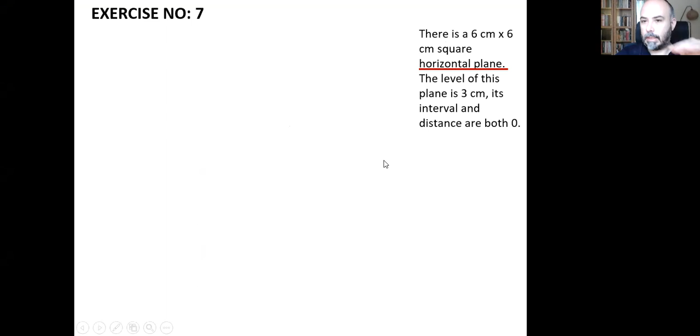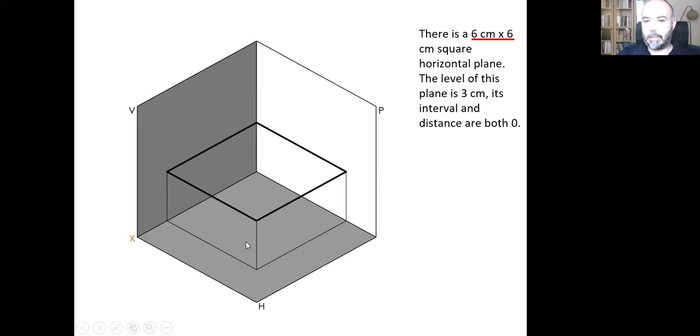So let's remember how the horizontal plane looked like. It is here, it is parallel to horizontal projection plane and perpendicular to vertical and profile projection planes. And it says that it is a 6 centimeter by 6 centimeter square. So this is how it is created. Since its level is 3 centimeters here, and its interval and distance are both zero, we can locate it, we can position it like this.

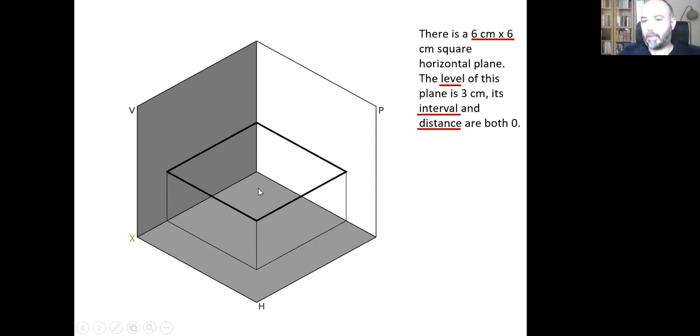There is a 3 centimeter level difference between horizontal projection plane and our horizontal plane. However, these edges are intersecting with vertical and profile projection planes. And these are the dimensions in millimeters. On this plane, there are three profile projecting lines.

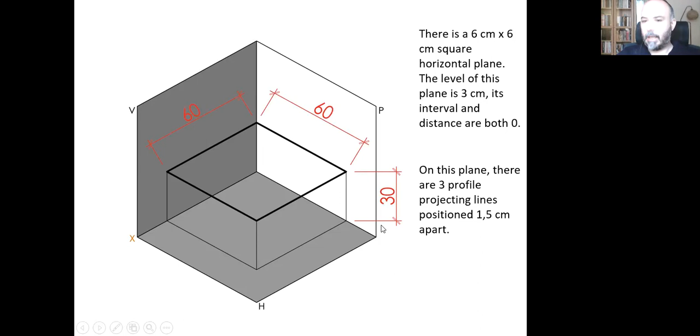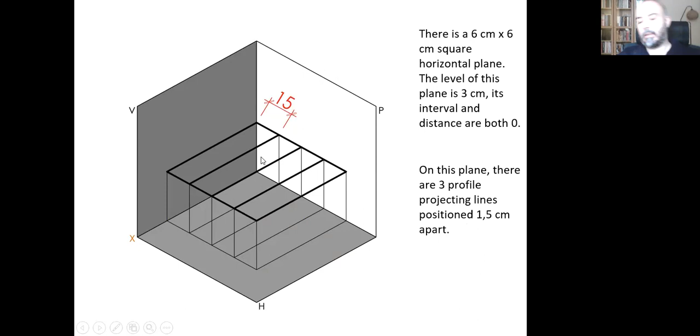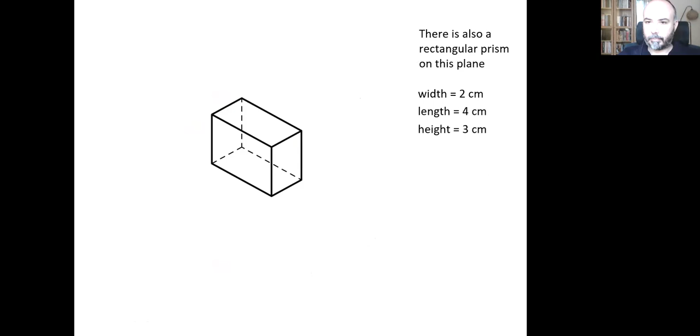And there is also a rectangular prism on this plane. This is what a rectangular prism looks like. It has certain dimensions. Its width is 20 millimeters. Its height is 3 centimeters, and its length is 4 centimeters.

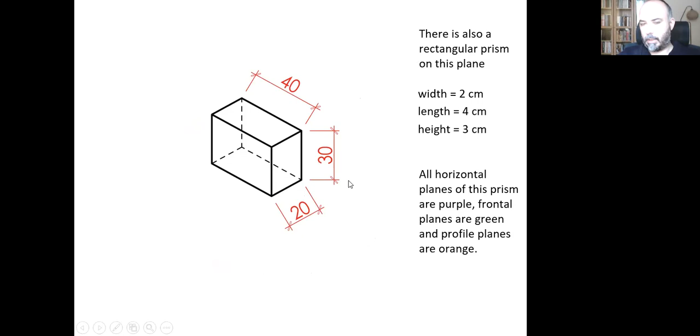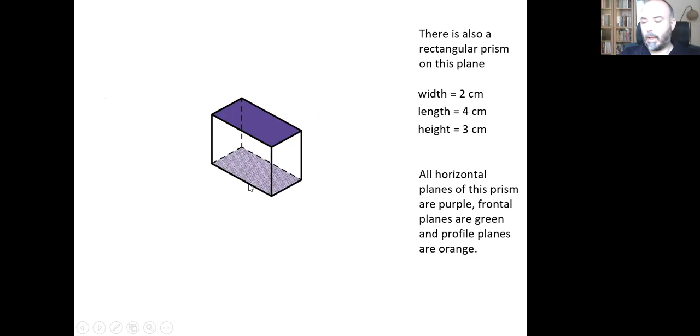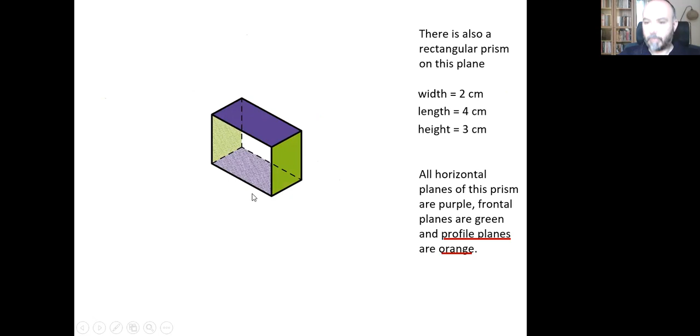All horizontal planes of this prism are purple. The horizontal plane was this. So all these surfaces, the two surfaces are purple. Frontal planes are green. This is the frontal plane. So these surfaces are green, and profile planes are, here we see the profile planes. They are orange here. And it is positioned on this horizontal square plane that we already created.

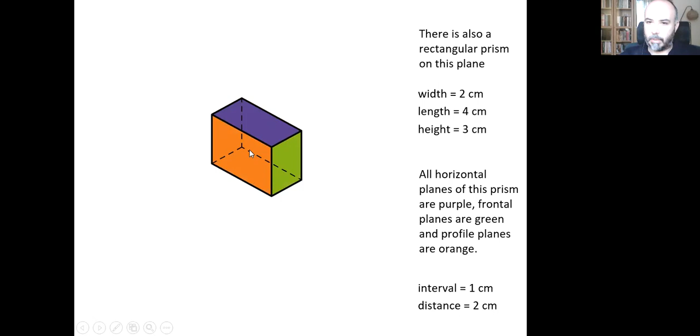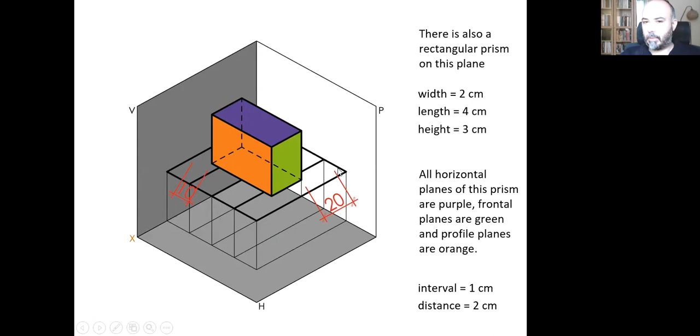It's been centered so that interval and distance for this prism is 1 centimeter and 2 centimeters respectively. Here we see a 1 centimeter gap between vertical projection plane and the green surface back here, and 2 centimeter gap between the profile projection plane and orange surface back here.

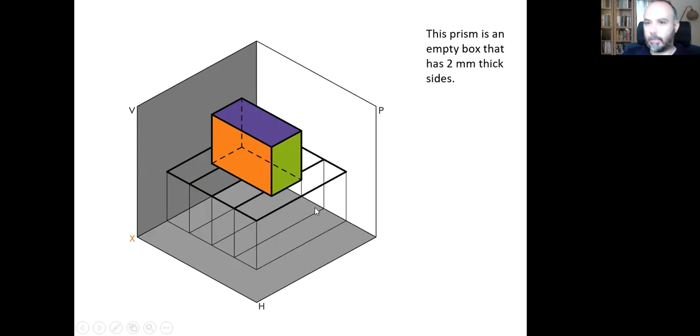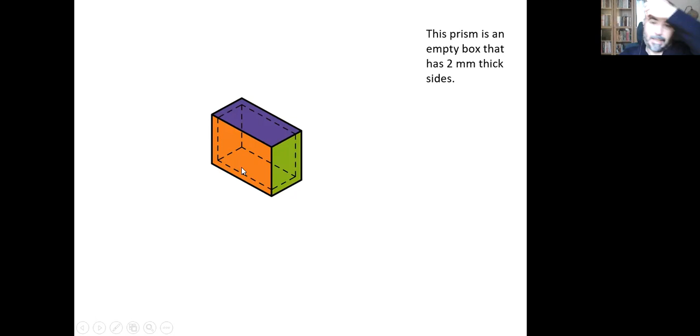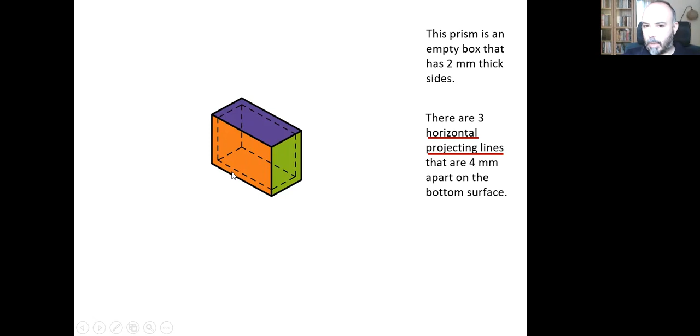And it continues. It says that this prism is an empty box that has 2 millimeter thick sides. Here we see the thickness of all sides, all 6 sides, and there is an empty space inside this box. There are 3 horizontal projecting lines that are 4 millimeter apart on the bottom surface. So on the bottom surface of this box, there are 3 horizontal projecting lines.

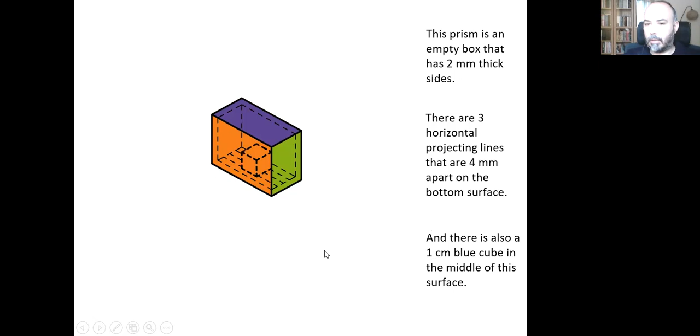Here we see they are perpendicular to vertical projection plane and parallel to horizontal and profile projection planes. And there are 3 lines, each have 4 millimeter gaps between them. And there is also a 1 centimeter blue cube in the middle of this surface. So this is the whole system.

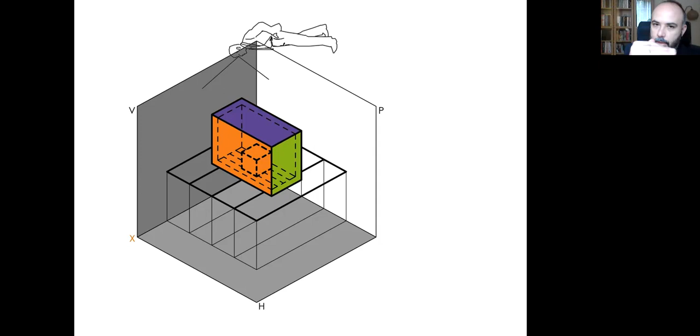As the exercise, we are asked to hand draft the projections of this system on Epure of Monge by using our usual drawing tools. We are supposed to color them after the drawing is finished. So we can start by imagining that we are at the top of the system and we are looking down and we are supposed to draw what we see at this position.

So we can start by fixing an A4 drawing paper on our table. We learned how to do that 2 weeks ago. And after that, we can draw a pair of Monge squares. These are our projection planes. We can choose 8 centimeter squares for each plane.

Here, at this situation, we are above the system looking down. So we are seeing a horizontal projection plane in front of us. We cannot recognize the vertical and profile projection planes. So to start with, we are just concentrating on this part of our Epure of Monge, try to ignore the rest, and we know that this line here represents the vertical projection plane.

Since we are above the system, we cannot recognize that it is a plane. We can just see the upper edge of the plane, and here this line is that upper edge. And this is the same with the profile projection plane. We cannot recognize that it is a plane. We can just see the upper edge. Here, this line represents the upper edge.

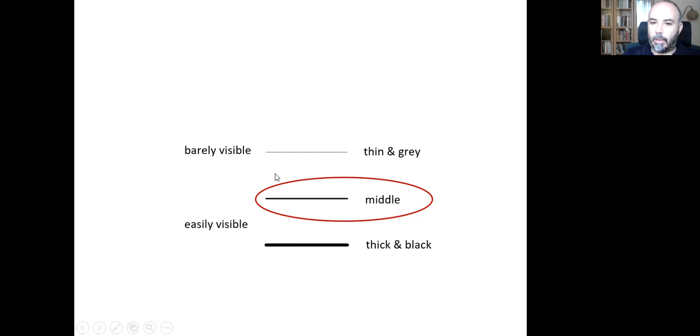So while drawing the frames of these projection planes, we need to choose one of these lines, and we need to go for the middle one. Because as you can remember, the thin and gray ones are the barely visible lines that we use as guiding lines. If we want to make sure where our lettering, our drawing, or anything else needs to be positioned, we can use these lines as the guiding lines. And the rest is for our visible lines. And we need to use the middle thickness, middle darkness lines in order to create the frames of our projection planes.

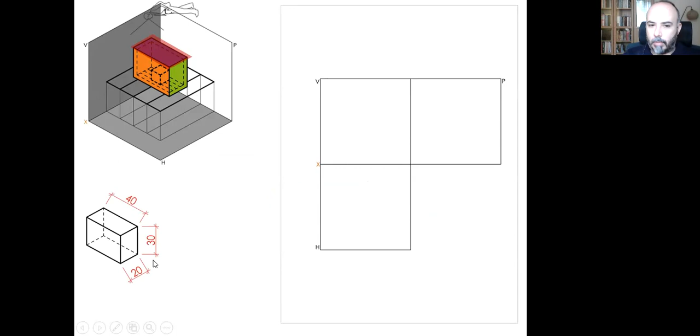So let's start with the surface that is closest to us. If you are standing here on this position, this purple surface is the closest one to us, and we need to draw it. Let's remember its dimensions. We see a 40 millimeter length and 20 millimeter width. And because of its position, there is a 1 centimeter gap between the vertical projection plane, and from the profile projection plane there is a 2 centimeter gap.

So if this line represents the vertical projection plane and this one represents the profile projection plane, first I need to use my T-square and set square and measure a 1 centimeter length in this direction, and do the same to measure this time a 2 centimeter gap in this direction so that I can find this corner here. And it is this corner of this purple surface.

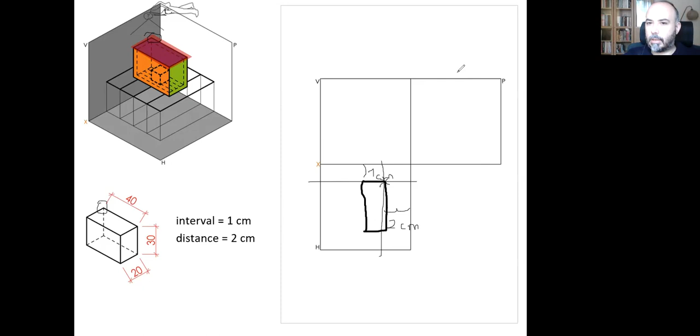Once I find this corner, I can start drawing the rectangle, the purple surface here. I need to go 4 centimeters down and 2 centimeters to the left so that I can create this drawing here. And imagine that we did this drawing. Again, I am using the middle thickness, middle darkness lines because this is something that I want to show to other people. It's not a guiding thing for me.

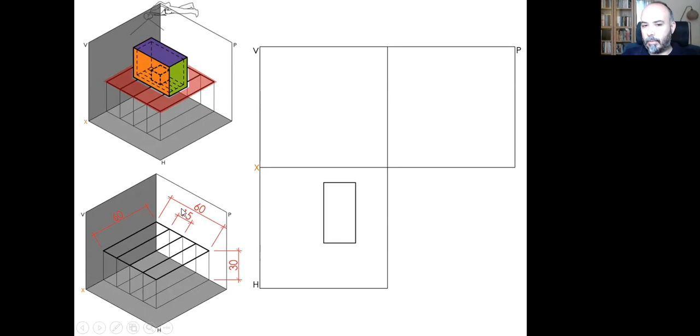Once I finished drawing this purple surface, that was the closest one to me, I can move a little bit further and I realize that there is this square horizontal plane with profile projecting lines on it. I need to remember the dimensions. It's a 6 centimeter by 6 centimeter square plane with 15 millimeter gapped lines, 3 lines. So this is what I need to draw right now.

And since the interval and distance of this plane are both zero, I can start drawing over this line for 6 centimeters, and then I need to go downwards to create a perpendicular angle for 6 centimeters, 6 centimeters in this direction, and I can close the system. And after that, I can measure just 15 millimeters here and draw this line that goes under the prism, and create 2 more similar lines. And here is something that you need to consider.

While I'm drawing, I left a little gap here. I did not intersect these lines with the edges of that purple surface, because this is a trick that you can use. But please do not forget that this is optional. It's not mandatory. If you want, you can use it, or you may not prefer this method. This is just to indicate that this purple surface is above the lines and the square surface here. There is a level difference. This gap is to indicate that feeling in a better way.

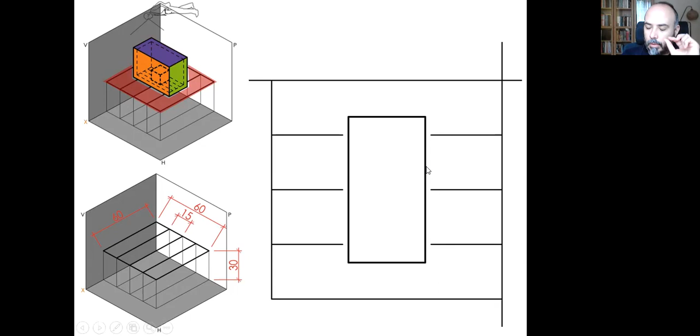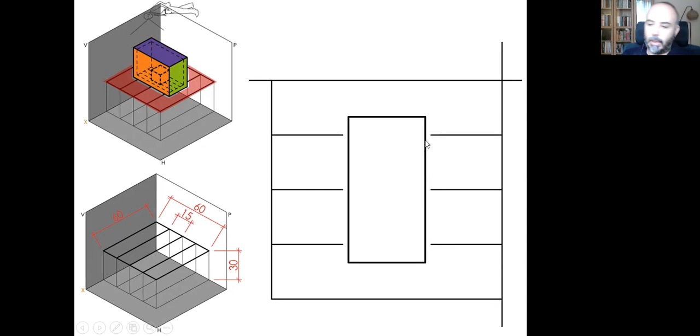And you need to leave a very little gap for this. You shouldn't prefer a wider gap, otherwise it may cause other problems. The gap should be just a little thicker than the tip of your pencil. That will be enough to express this feeling here. And now I drew the purple surface and the one a little bit lower than this surface, this square plane here. And I am just checking, is there anything left here? No. And now I can start drawing the inside of the box.

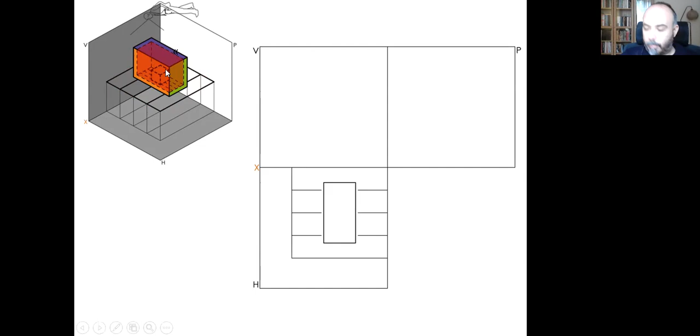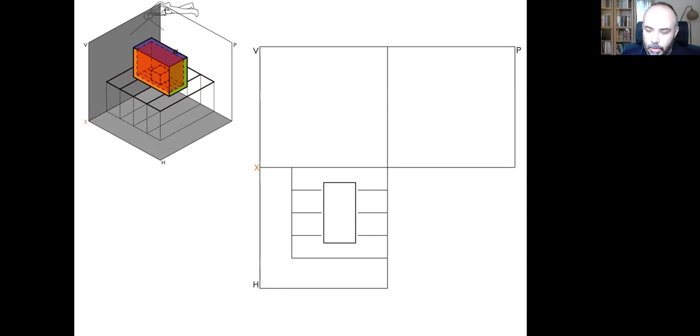Normally, I don't see that because it's a closed box, and this purple surface blocks my view. So I am not able to see what's inside the box here, but I need to give this information so that other people who are going to use this drawing can understand that it is not an empty box and there are other objects inside this box. And how can I do that?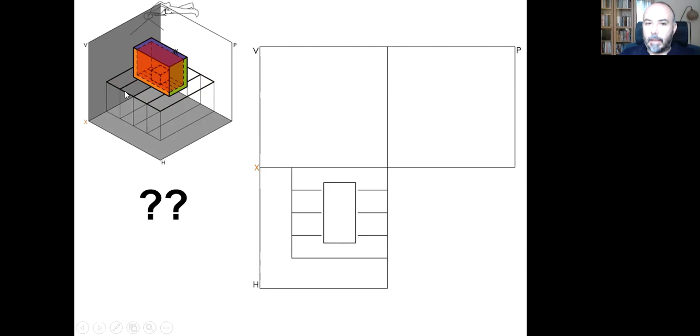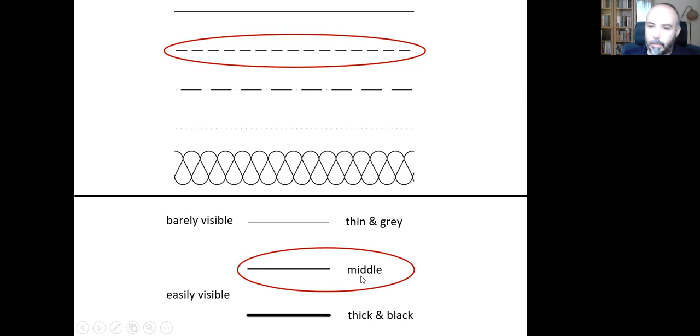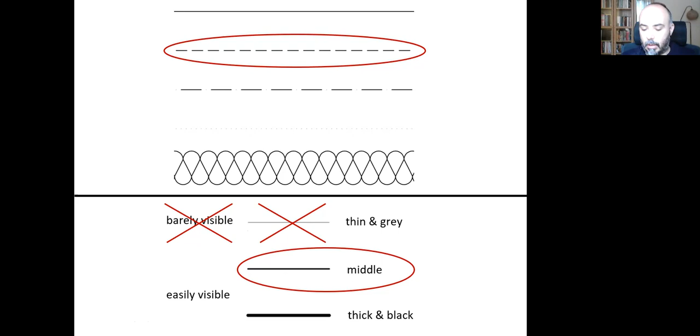For those two things, we can prefer this dashed line here, but please do not forget that this dashed line should be created using middle darkness, middle thickness line weights. When we say that this line represents something that we cannot see, many students get confused and try to use thin and gray lines, because they think these lines should be barely visible. Please do not get confused about it.

You need to use this dashed line here with this line weight, middle thickness, middle darkness. You don't go for barely visible lines. That is something totally different. That is a guiding thing for ourselves.

This is the reason that it needs to be barely visible, because I do it myself for myself. I don't need to express this to other people. However, with these dashed lines, I want to express something to other people. So I go for middle thickness, middle darkness.

First, I need to draw the thickness of these sides. There is a 2 millimeter thickness on each of the four sides. So I use dashed lines 2 millimeters apart, offset from this frame of the purple surface. And I need to be careful about the positions of these lines. I want to create equal lines, as equal as I can, but I don't measure them with my ruler. I just trust my eye here.

I try to make them as equal as I can here, and the intersection again needs to be very smooth in the corner, in all four corners. This is very important for us. And after I draw the edges, I can draw the bottom surface. There are three lines, three horizontal projecting lines, which are 4 millimeters apart from each other. And in the center, there is a 1 centimeter cube. And these are still blocked by the purple surface. So I use the same line type with the same line weight to create these objects as well.

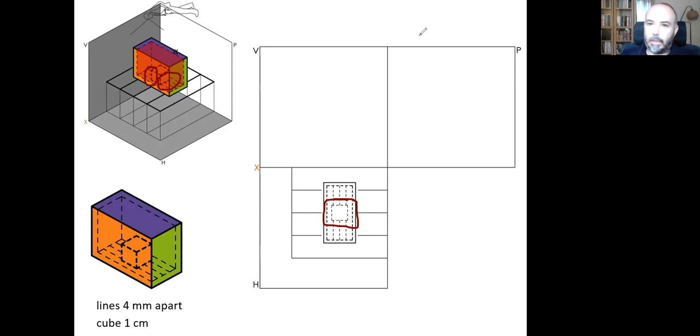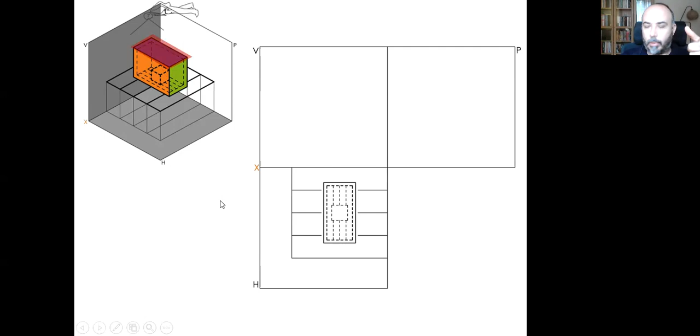And once I finish the drawing, I need to check if I missed something, and I need to make sure that I represented everything here. Everything that I see: the purple surface, the square plane, and the objects inside the box. And once I finish the drawing, I can start coloring. Here is the purple surface that I need to color.

And here are some more tips, very important for you when you are doing the coloring. Let's say that you are using a colored pencil here. Every time you touch your pencil, there will be strokes on your paper, and this goes the same with your markers. According to the tip of your marker, you will get different widths of strokes. And of course, with your watercolor painting, every time you touch the tip of your brush, there will be brush strokes on your paper. Here, there are two important points that you need to consider.

Your strokes, either the pencil strokes, the marker tip strokes, or brush strokes, should be in an orderly position. You can go for these 45-degree angle strokes. You can do crosses. Or you can do different positions, like you can go this direction, or you can prefer this one here, or you can mix and match them. But there needs to be an order here. Or you can try to create a shade that doesn't reveal any strokes at all. And for this one, you need to do your strokes as closely as possible to each other. And if you want, you can mix them with other types of strokes.

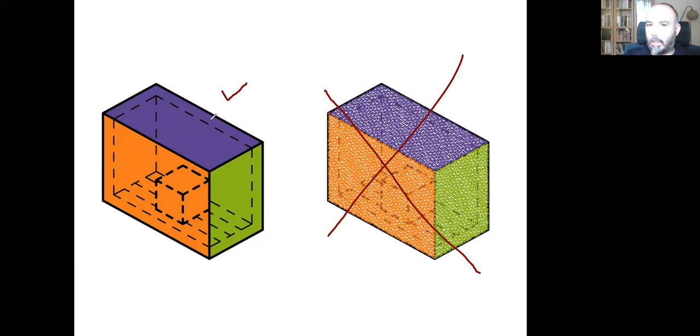And you will get just one shade that doesn't reveal any strokes, any lines at all. You can prefer one of these or this one here, but please try to do them in a nice order. And the other important thing is, whether you choose the shade or the strokes, your drawing shouldn't be blocked by the painting. After you finish your painting, we should still be able to see the lines. The lines shouldn't be blocked, shouldn't be shadowed by your painting. This is not what we want. This is not what you are looking for. This is the correct way of architectural drawing, in my opinion.

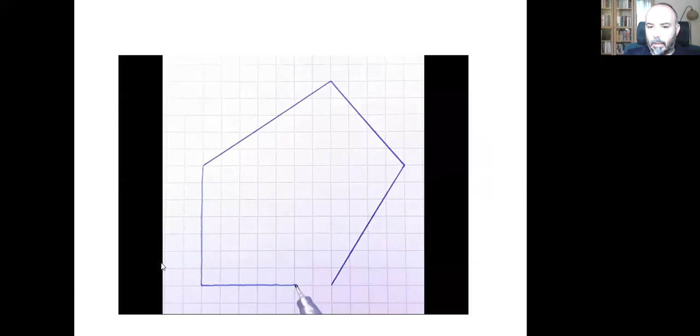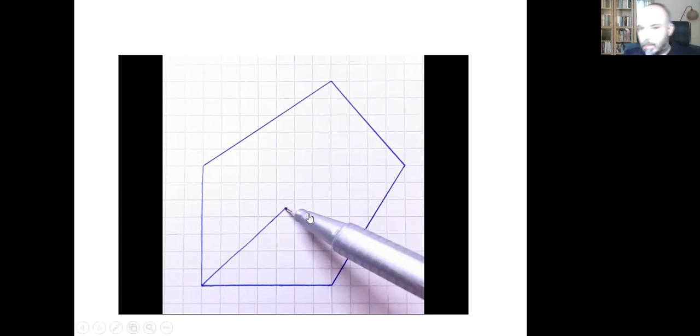Here is a nice video that we can watch together. Look, even if this person is making a freehand drawing, they are using the graph paper as the guides, so that their lines are very nice, and you can see that they are almost perfect. They are creating the same line weight along the lines, and please be careful about the intersections here. This is either with our tools or without the tools. This is what we are aiming for.

And here, if you use this tip of the marker, you will automatically get a nice shade without any strokes. And please be careful about the edges here. You don't want to pass this border.

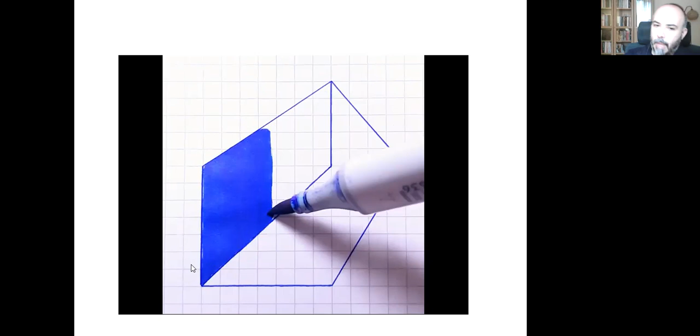Just going to show you one more example. Again, here, look how the strokes are parallel to each other. You can do this, and it will look nice. And here again, with the tip of this end, they can manage to have a shade without any strokes.

And if you want to do this with your pencil, you need to do more. You need to apply more pressure so that at some point those strokes will be invisible and you will get the same result if you want. Okay, let's move on. Yeah, this is not what you want. This is the bad example. This is not what you want to do. This is what you are looking for.

After you finish your coloring, either with strokes or without the strokes, the lines should be visible now. And since we finished the upper view of the system, now we can start the second step, which is the frontal view, so that our guy here changed his position. Now he is in front of the system and he's looking at this vertical projection plane here. And here we are going to draw what he is seeing at this position.

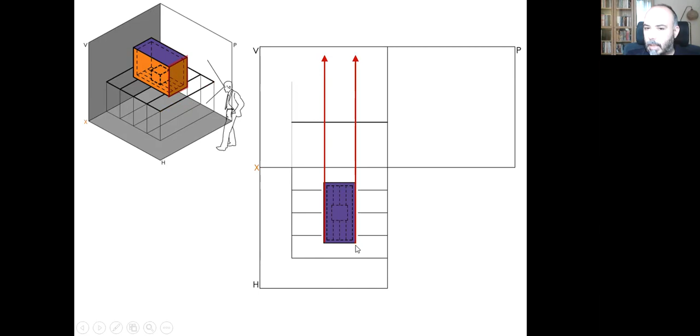Once we finish drawing this object, we can move a little bit further and we will see that there is this green surface right in front of us and we need to draw this. But again, I don't need to measure the width and the distance of this object because it is right in front of me. I can just carry this point up here by using, again, guiding lines, and this one here, so that I will be able to carry the width of this green plane and its position, the distance, the length between this edge here and the profile projection plane.

And the only thing that is left is to measure the height of the plane, that is 3 centimeters, so that I can be able to draw the edges of this plane, this green surface here, with, again, middle thickness, middle darkness lines, because these are the things that I want to express to other people.

But here, again, I just left 2 little gaps at the intersection because I want to emphasize that this green surface is not at the same level as the edge of the horizontal plane here. There is a level difference. The same method that I used to indicate that there is a level difference, I can go for these little gaps. They should be no longer than the tip of my pencil.

Here we can see it closer, so that the viewer, the person who will be looking at this drawing, can understand that there is a level difference between these 2 objects here. Since I finished everything visible for me, I can go for the invisible part of the box here.

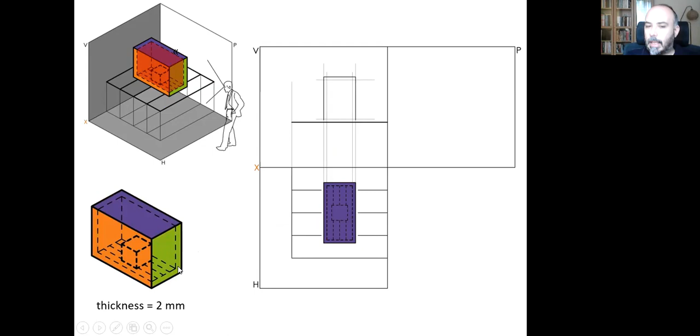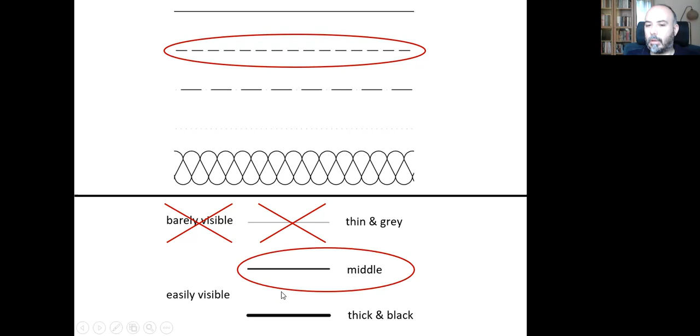I go for this dashed line, but I don't prefer the barely visible. Now I go for middle thickness, middle darkness to create my dashed lines because this is something that I want to represent to other people.

And please do not forget that this line here is intersecting. This one here is the line that is in front of the guy, and I don't need to draw this line here back because they are intersecting, they are the same. So when I measure 2 millimeters up here, it means that I am measuring 2 millimeters between these two lines. That's the thickness of that bottom surface here, just like I did for the upper surface.

Yeah, so now I can draw the cube. Again, I need to carry this information up here. I am carrying these 2 points because they are representing the lines of the cube. And I need to measure 1 centimeter up. That's the height of the cube, to create my dashed lines in order to indicate that this is something blocked by the green surface. And since I finished the drawing, I just check if I missed anything, and make sure that I draw everything here.

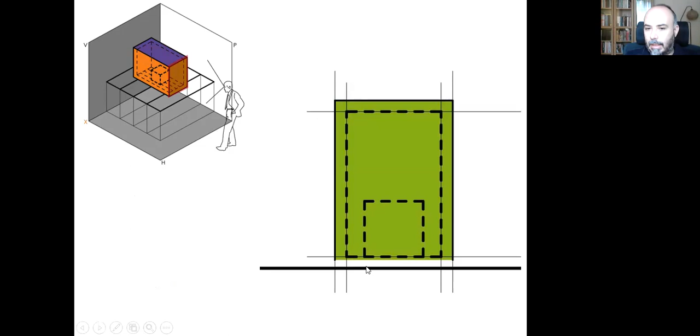I can now color the surface again, but if I leave just a little gap here, I need to leave the same gap with the coloring as well. Just a little gap between these two surfaces just to indicate that there is a level difference.

Now I can move on to the third step, and our guy just changed his position to the left side of the system, and he is now looking at the profile projection plane, so I am concentrating on this part of my drawing, try to ignore the rest for now. And now I know that this line represents the horizontal projection plane, and this one here represents the vertical projection plane.

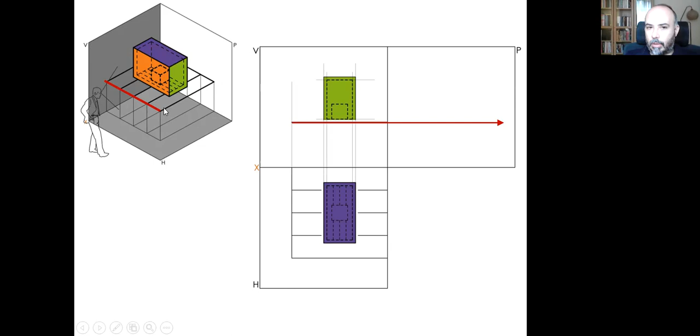And I can start by drawing the closest object to this guy, and it is this edge of that square horizontal plane. But this time I don't need to measure anything because all the information is right in front of me. I just need to carry this point towards the right. And when I do this, I am carrying the level of this horizontal plane.

And after that, I need to carry this point up here by using my compass, because this 6 centimeter here will be transported to this edge, and with my compass I will be transporting this same length up here with this perpendicular line. And for these lines I am preferring again the barely visible guiding lines with thin and gray line weight. And once I created my guides, I can use my normal middle thickness, middle darkness line type to indicate the edge of this object.

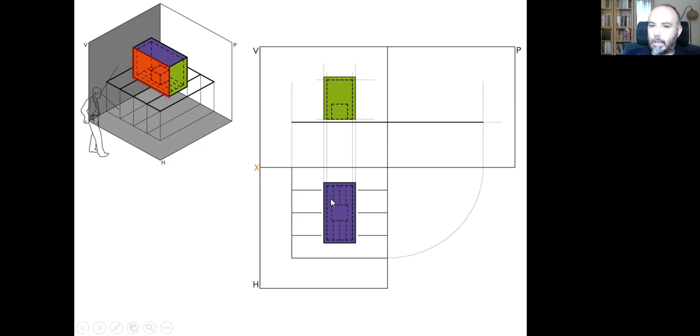And once I finish it, I go one step further and try to find out what's in there. I see this orange surface. Again, I need to carry the height of this surface from the frontal view. I need to carry the width and the interval of this surface from the upper view here by using my compass and create these guiding lines so that I can draw the side view of this object. And once I finish the drawing, I can move on to the invisible part of the system.

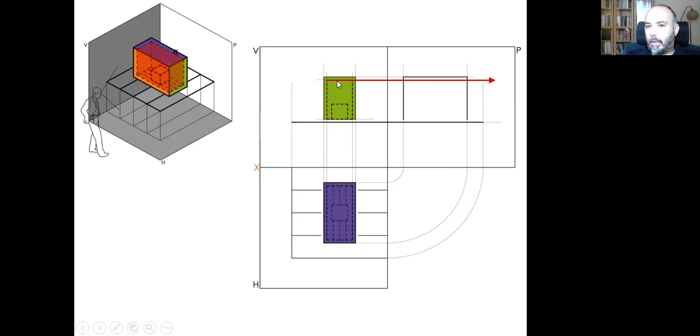Here I can just transport the thickness of the 2 millimeter upper surface and 2 millimeter side surfaces here. And I just forgot to draw this line here. I need to carry this information as well, the 2 millimeter thickness of the bottom surface. And once I do this, I can create my guiding lines in order to draw the dashed line of the inner part of the object.

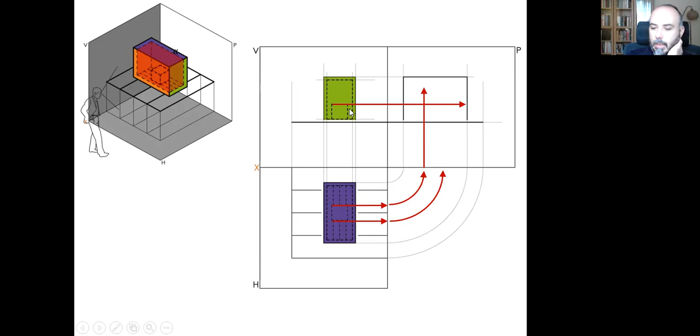And after that, I can just transport the height and the width of the cube to draw the cube itself. Once I finished, please ignore that there was a mistake with the presentation. I just missed the dashed lines here. This is the right image.

Once I finished drawing everything, I can color it again while leaving the gap here. It is important to prefer one of them. You can either go for the gap, or you can go with the normal intersection and not use this gap to indicate that there is a level difference, an interval difference, or distance difference here.

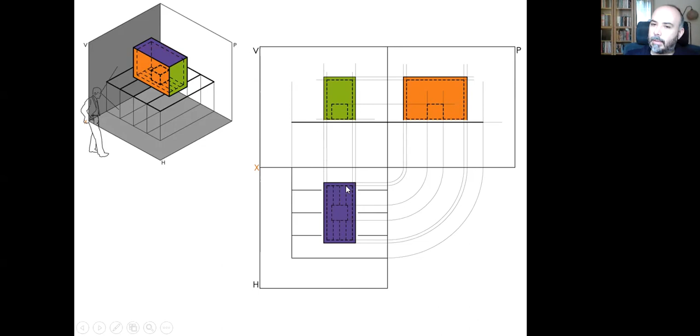But you need to do the same with every one of your drawings. You cannot prefer the gap here and close the system there. You need to do the same. If you prefer the gap method, you need to do the gap with every view here.